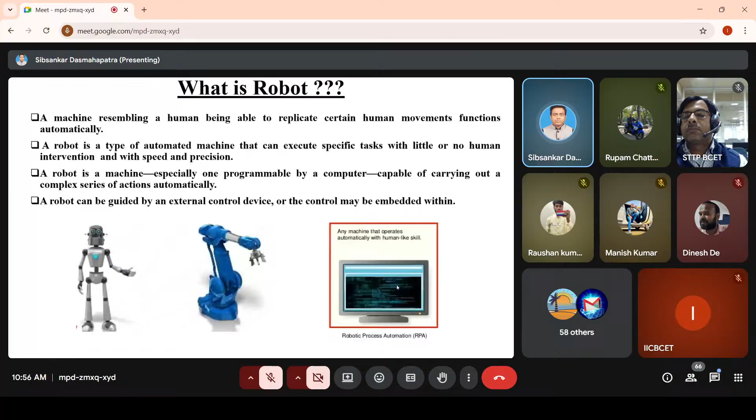So this is the main difference, this is the main definition of how you can distinguish the robot and the human beings. Try to understand that from this particular slide. Maybe there are a few sentences written, but this is the main difference between robot and human beings. Now comes the next slide, related to our STTP program.

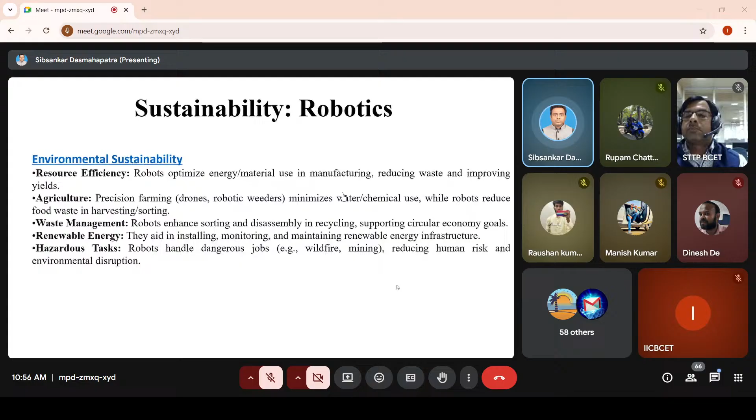What you have is sustainability. Sustainability means that development. Suppose you have to build an industry in an area, because you guys are coming from Durgapur. Durgapur is a very developed city, and the industries are there. Suppose another industry has to be developed in a place where some trees are there, so you have to cut the trees to build the industry. Now think about whether that development will be sustainable, yes or no.

One thing you have to think: I am developing the industry, that is fine, but at the same time you are decreasing the level of oxygen, because you are cutting some trees and some forest. So what you have to do is develop the industry, and parallelly cultivate some trees in another place, or maybe around your industry there should be some trees, so that the development will be sustainable.

This is one very simple example. Common people can understand how development can be sustainable, because we have to develop in a way that our future generation should not suffer. So this is sustainability.

Now comes the point of how sustainability is related to the robotics point of view, because my topic is robotics and your STTP is sustainability. So that should be related, that should be connected. How will it be related?

Now, from the environmental sustainability point of view, one point I can say is resource efficiency. What is resource efficiency? A robot can optimize the energy or material used in manufacturing. Now suppose a human being is employed in a manufacturing industry; he or she may not have enough idea how to optimize that material or energy. But a robot or manipulator which has been given some command on how much energy or material should be used for that manufacturing will be optimized.

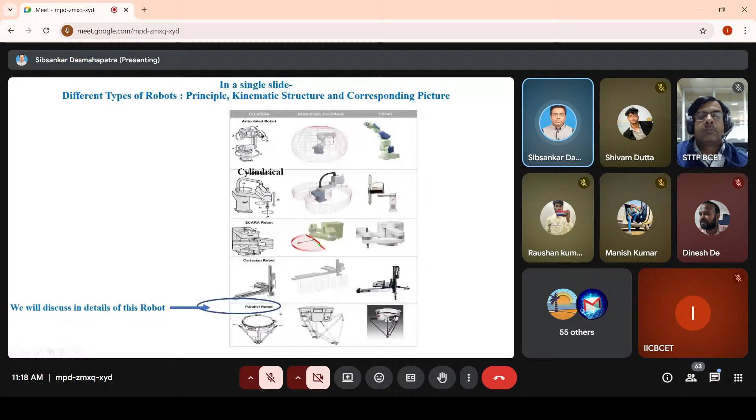Now comes to the different types we have already discussed in a single slide. I have given, in a single slide, some looks - this is the articulated, cylindrical, SCARA, Cartesian and parallel manipulator. Now comes to the parallel manipulator, which we will discuss here - how the modeling is done, how motion dynamics can be done, what is the kinematics, and their simulation work and experimental works done with some real-time experiments.

So theoretical discussion - what is a simulator? Now, which can simulate different types of simulators - that means, suppose a pilot has been given some training before going to real-time applications. He or she should be given some training - how it can be done. He or she has some idea before going to the real-time application, some idea related to a replica of that type of thing. He has some idea of how to operate the real-time application before going to that. What he or she will do with this particular replica - that is actually the simulator.

If I go to that slide, you have the idea of what a simulator basically is. This is the motion simulator - here the pilot will be placed, he or she will sit here, and below that platform the motions will be generated, and the pilot is sitting there. He or she has some idea of how to control in the real-time situation. So this is called basically a motion simulator.

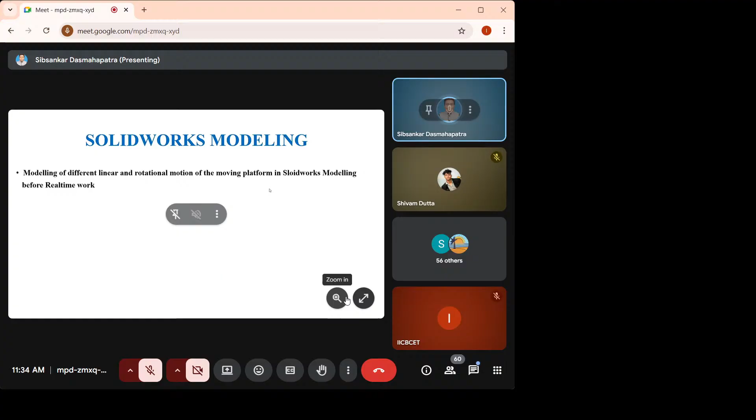So before going to fabrication, what is the fabrication term? Fabrication basically means going to the manufacturing part. So before that, you should have some modeling done in different software. We have done it in SolidWorks. SolidWorks modeling means you have to design exactly what you are planning, giving the bottom point, top point, actual dimensions, whatever you are planning, to that particular software.

If you go through that software you have some idea, or even if you don't, you can still do the work, because as a mechanical engineer, electrical engineer, or any branch, before going to real-time applications, you should go through SolidWorks modeling and simulation. Whether any error is coming, any fumbling is there, whether any correction is needed, you can do it in the simulation, where only time is spent but not too much money, because you are not going through manufacturing.

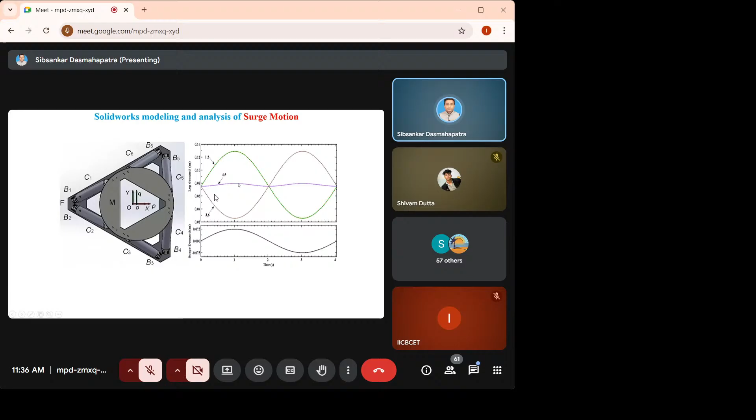So this is the SolidWorks modeling basically, where the three linear and rotational motions have been done. I am going through that slide now. This is the surge motion. In the slide, surge motion, if you follow actuators 1 and 2, that is the same extension motion. At the same time 3 and 6 are in retraction with the same magnitude but different phase, and 4, 5 show very small extension and retraction in case of surge motion.

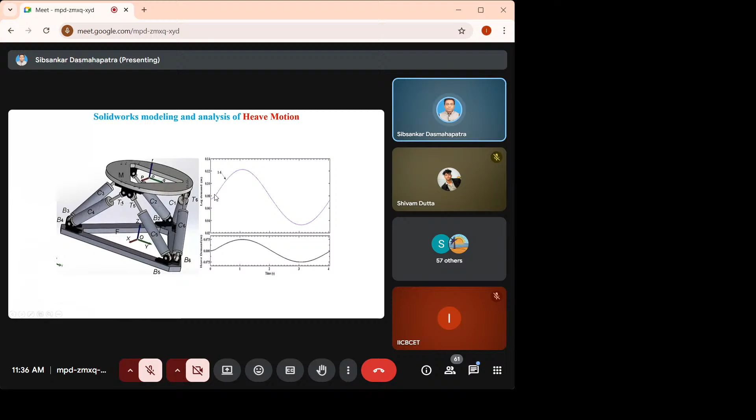Similarly, if you go through sway, 4 and 5 move in the opposite direction, 1 and 3 are coupled, 2 and 6 are coupled in the opposite directions. But in heave motion, all actuators move in the same motion, that means in the Z direction. So if you see 1 to 6, all the actuators have the same motion. Similarly, roll and pitch motions have been done in the SolidWorks modeling.

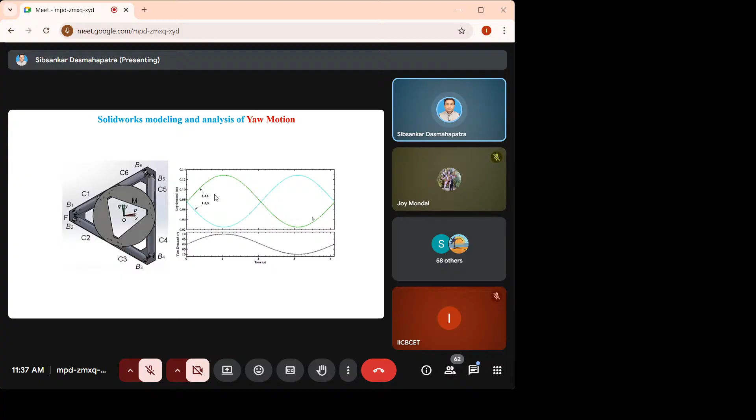Now we come to the mathematical part, the motion dynamic equation. This means how a particular piston and piston rod is moving inside the cylinder, which has to be done with mathematical dynamics modeling.

Why is it required? When you have to control each and every actuator individually, you should know the dynamics of that part. Just like a teacher going to class should know the characteristics of each student so they can control them. When I first joined a college, I had the problem of how to control the students. After a day, two days, ten days, a month, I learned how to control Mr. X, Mr. Y, Mr. Z, because all students have different characteristics, not a unique one. So similarly, you should have the dynamics equation.

This dynamic equation has been written, not going into the details, but this is how you have to design the dynamics modeling. Whatever you are designing, if there is dynamic motion, a dynamic mathematical equation should be designed.

Okay, then comes the kinematics. So what is dynamics and kinematics? This is related to our mechanical point of view. Other departmental faculties may have this idea too, but from first year or second year basic science, we have the idea of dynamics and kinematics. Dynamics is related to motions, where accelerations will be there. But kinematic analysis, in the particular 6 degree of freedom Stewart platform or serial manipulator, tells us the displacement of that particular piston.

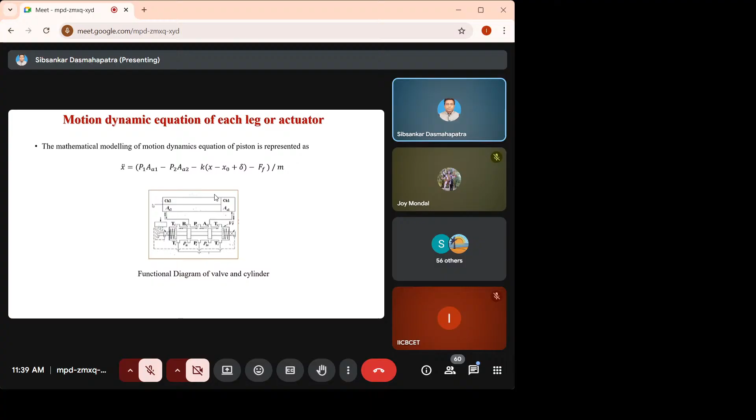Piston means the piston and piston rod. What is the particular displacement there? Once it will be in terms of force, then it will be dynamics, and when it will be only the displacement, it will be the kinematics.

So in the kinematics part for our parallel manipulator, there are two parts of kinematics: one is inverse kinematics, another the forward kinematics. What is inverse kinematics?

Suppose a third party gives the roll, surge, heave, whatever motions there are - he is giving a 15-degree roll, and I have to create it. The question is, to create that 15-degree roll or say 60 millimeter heave motion, how much displacement of each and every piston is required - that calculation should be done by the kinematics modeling, and that mathematics is called inverse kinematics. That should be clear.

What is the forward kinematics? Forward kinematics is just the opposite - meaning if you are giving the points of each and every piston motion, then you have to calculate the final motion of the moving platform. That mathematics is called the forward kinematics.

So these are the mathematical things required. The mathematical equations have been given - you can follow up. But I am giving the basic idea of what is inverse kinematics and what is forward kinematics.

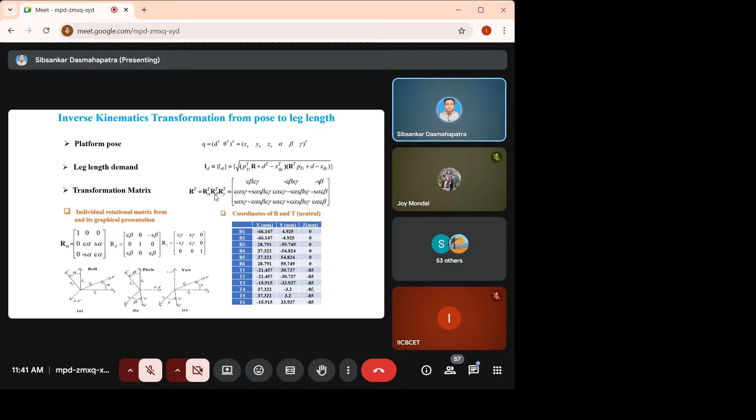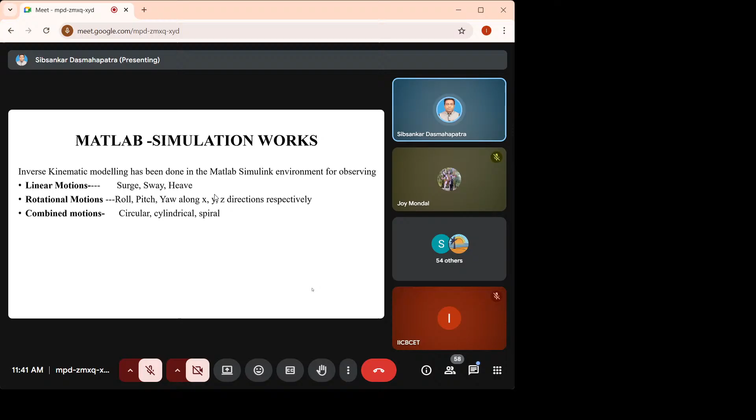Now comes the MATLAB simulation work. What we have done previously was SolidWorks modeling. Then, before going to the real-time work, you should have the MATLAB simulation to validate your SolidWorks modeling.

So in the MATLAB simulation also, surge, sway, heave and roll - each and everything has been done. It has been compared with the SolidWorks results, to check whether it is matching, yes or no, and how much percentage is matching. If it is not matching, you have to go back to the SolidWorks modeling or mathematical modeling to find where the errors are and rectify them.

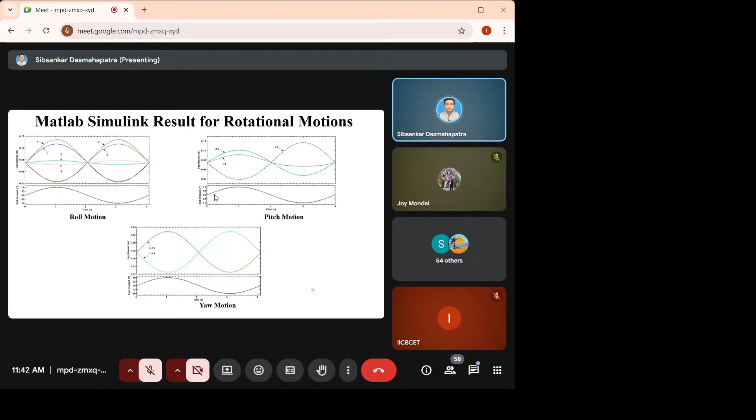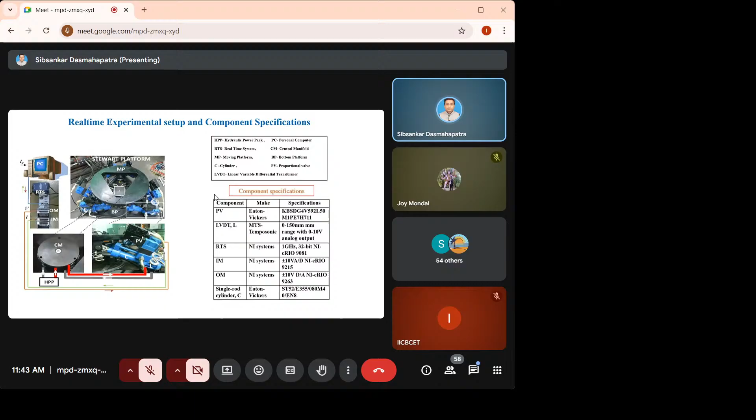This is the output module, this is the input module. The input module basically receives the feedback of each and every piston, how much it is moving. The output module basically gives the signal to the piston actuators in the proportional valve, how much motion should be done for each and every piston. So this is the total real-time experimental setup with the hydraulic actuator.

This is the controller design. What I have told you is the requirement of dynamic modeling or designing some controller. Controller means something which will control your required motion. Suppose you are giving say a 15-degree roll, it will be calculated by inverse kinematics modeling how much the required position of each and every piston should be - that is called LD.

Now you are sensing with the LVDT - LVDT means linear variable differential transformer. So with that you are measuring the actual motion of each and every piston and comparing whether it is close to your desired motion. If there is some error, you should rectify it.

So how can you rectify it? That question can be solved by the controller. Controller basically - just like in your college there is an exam controller - the exam controller's activity is to control the exam process very smoothly without hampering normal activity, without any failure of registration of students, or without any error in uploading numbers of students. This is the purpose of the controller basically. In our real-time experiment also, that controller's activity is to rectify that error.

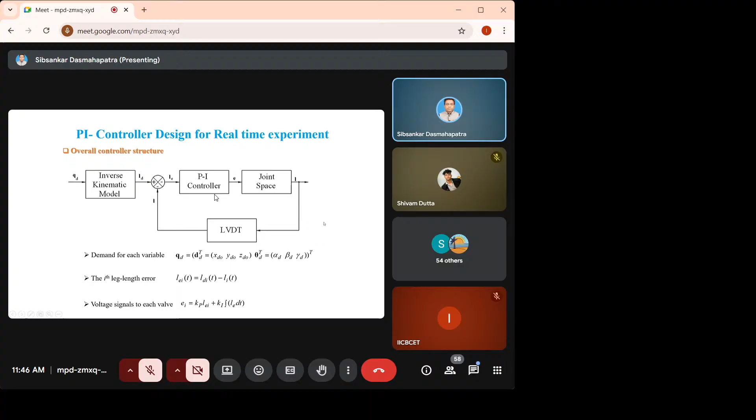That controller will produce the required command signal that will go to the proportional valve, and that will control whether positive voltage, negative voltage, or any type of command will go to the proportional valve in our figure. Again, it will come to the LVDT, and that process will be in a loop basically. So this is the PI controller design part.

Then there is the real-time experimental work with some single actuator and 6 actuators, with a few videos there. I'll show you after completing this part because it will take some time, so I'm not disturbing here.

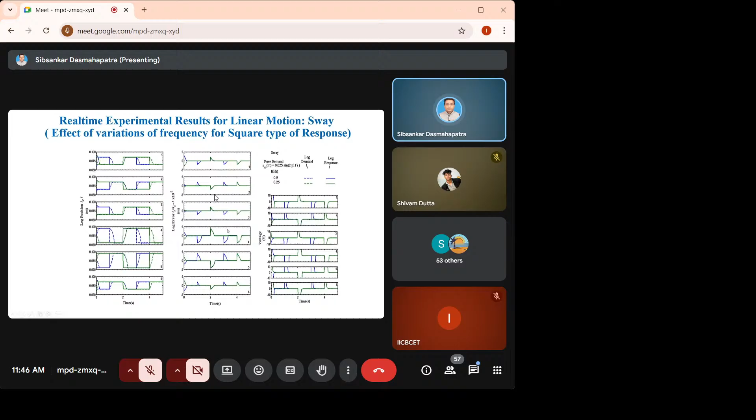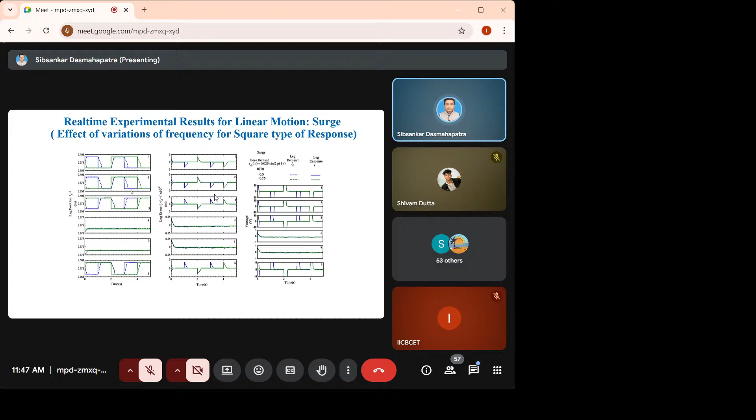Now let's come to some few experimental results. This is for the surge motion, few experimental works have come, and this is the sway. This is the heave motion. In heave motion, all 6 actuators are in the same motion, but in case of surge or sway, there are some coupling motions of different actuators.

Similarly roll, pitch, yaw, these are the experimental works. I'm not going through them in detail, because if you students go to any research work in future, you will have to go through that part yourself.

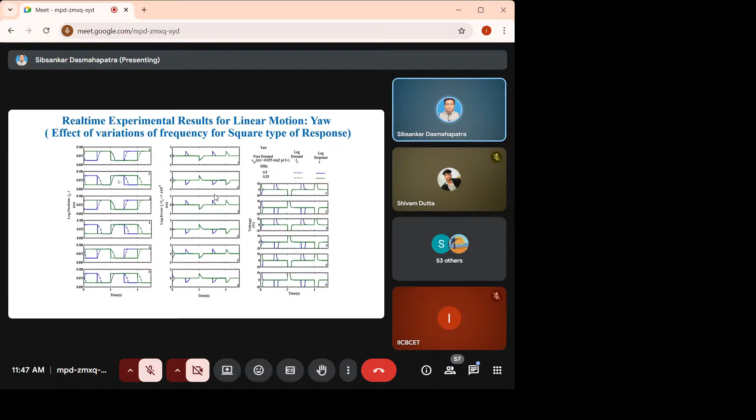Now let's come to the real-time motion of the electric Stewart platform. That work has been done by Mr. Mintu Ghosh, who is the assistant professor in our college. He has developed that part and is doing his research work as a PhD under my supervision in my college. That establishment has been done.

These actuators are electric actuators that have replaced the hydraulic actuators initially used. Why? Because cost is less - when you purchase a hydraulic actuator, the cost is very high, but load negotiation is high in that case. Here the load negotiation is less, most probably 200 Newtons per actuator. So if the moving platform has 1000 or 1200 Newton load, it can negotiate that near about.

The host PC controls what I told initially. Here an Arduino Mega board has been used, and for each and every piston that has to be controlled, we use the motor driver L298N, and another component is the voltage supply. That means 23 voltage supply has to be given to each actuator, and 5 voltage will be required for the Arduino Mega board, and the motor control card also requires it. So that's why one power supply has been used for everything.

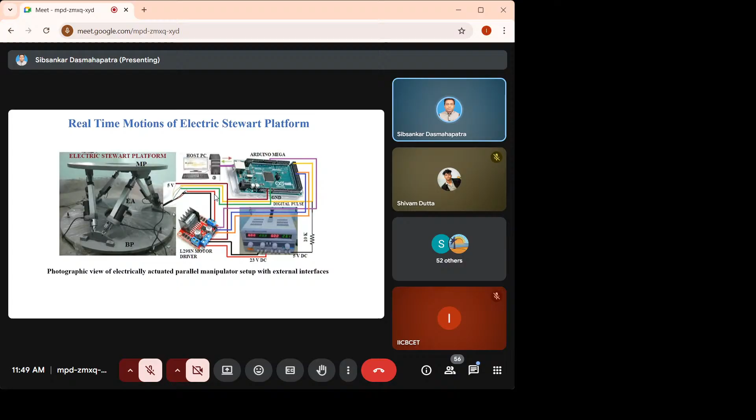Our main challenge was to get the feedback, because the feedback mechanism was by a Hall effect sensor which gives 0 or 1. From that 0-1 pulse counting, we had to determine how many millimeters of displacement of the pistons there were. That was very challenging work, taking most probably 6 months to 1 year. Mintu did that research on how to get that value, because there was no previous idea to go by - we had to do trial and error, and finally find out the result: within this much pulse counting, that much millimeter movement of the pistons occurs.

Now let's come to a few real-time applications he has developed. I have taken these figures from him. Thanks to Mr. Mintu Ghosh for developing these things and doing this work.

Suppose you have to design a slot like this, a 40-degree angle with radius 0.08 meter. If you do the yaw motion from minus 20 degrees to plus 20 degrees with amplitude 0.08 meter, the wax container is fixed and the moving platform moves. By that motion, you can make that type of slot. What is the advantage? When you make that type of slot manually, there will be some problems.

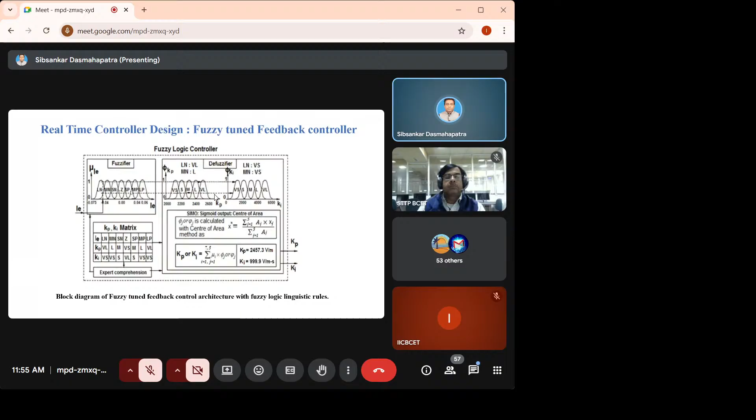So, what results has he already gotten? I have given here a few results with PI and fuzzy PI. If you compare PI and fuzzy tuned PI controllers on control parameters like integral absolute error, control effort, variance, standard deviation of error, and other parameters—I hope he has given IAE here. There are other control parameters too that he has results for, but they're not shown here, because you have to choose which controller is suitable for a particular operation, and then do the operation accordingly. So this is how you have to choose the controller.

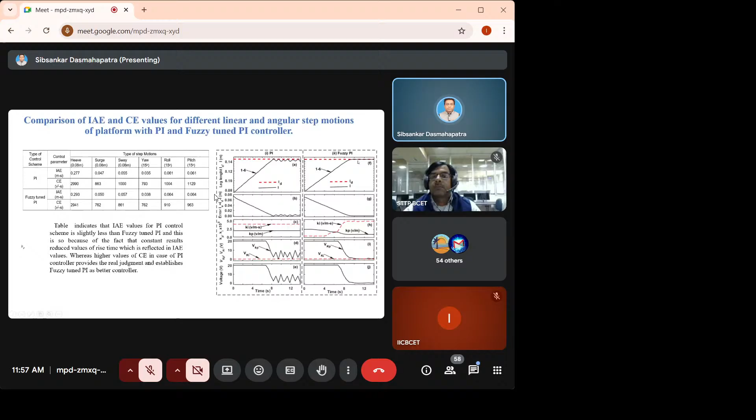If you see the figure comparing PI and fuzzy PI, in case of PI there is a noticeable chattering, meaning up and down vibration of the moving platform. In case of fuzzy PI, there is no chattering, because the error is less. In case of PI, nobody decides the value of KP and KI depending on the error, but in fuzzy PI, fuzzy logic does that—when the error is less, the value of P and I will be less. That's why there is no chattering, and the operation is very smooth. This is the noticeable figure I wanted to mention here.

Now let's come to some videos with the electric Stewart platform. Just check if the video is visible, Mintu?

Yes sir, it is visible. So this is the electric neutral to 80 millimeter. It is written neutral means total motion of the electric actuator, what we have taken, that is 0 to 150 millimeter. So neutral position is mid-span of each and every piston, that means 75 millimeter motion. This is called the neutral position in our case. So neutral to 80 millimeter means not the electric pistons, but 80 millimeter of your moving platform motion. So for the 80 millimeter motion, how much motion of each and every piston, that will be calculated by inverse kinematics. So that is the requirement of inverse kinematics. This is basically the heave motion what I have shown here, neutral to 80 millimeter.

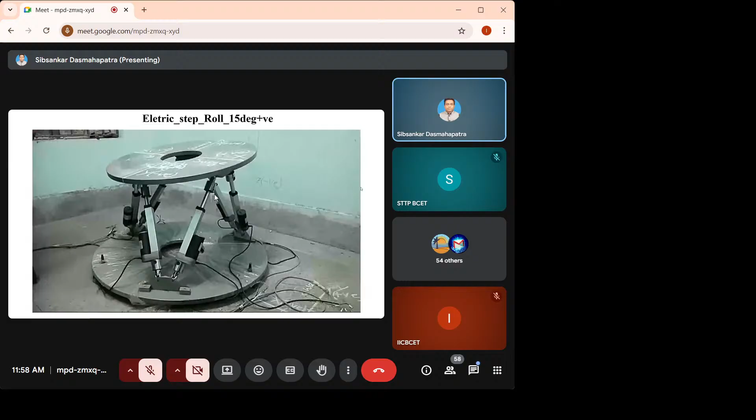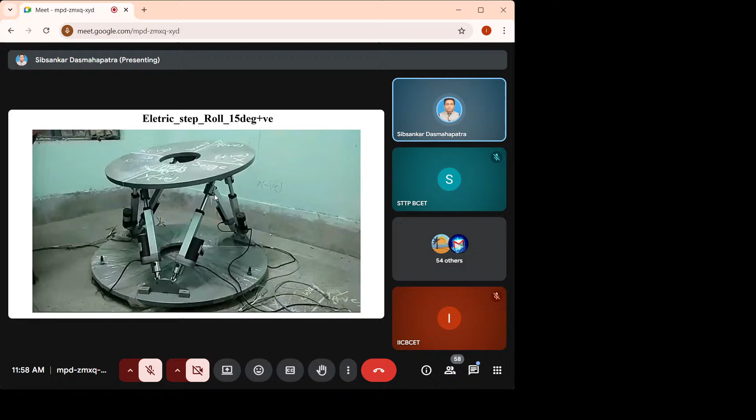And this is the surge motion. If you see, along the x-axis, that motion is done. This is the surge motion, 80mm surge motion. Yes.

And this is the yaw motion. Yaw motion means along the z-axis, the rotational motion is there. Yeah, this is a very typical type of motion.

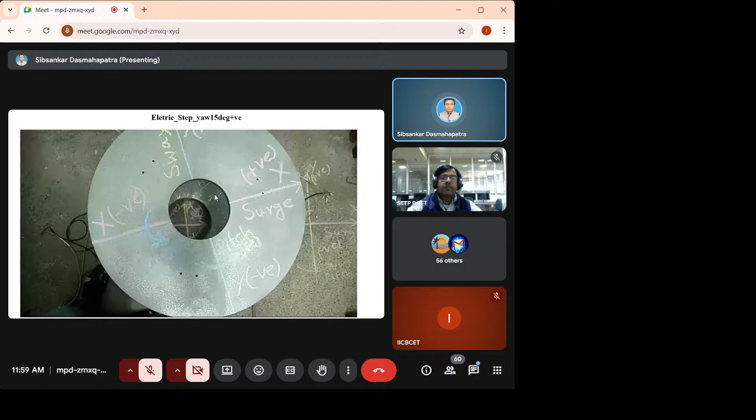Really, I'll share my feelings before going to that type of motion. I was confused also - if that yaw motion will be there, is there any breakage to the different joints? I have done simulation works in SolidWorks and MATLAB, but when it was done initially with the hydraulic actuator, I was confused. But as that design was very fine, there is no breakage, because it is just like a twisting type of motion. That is the yaw motion it has done.

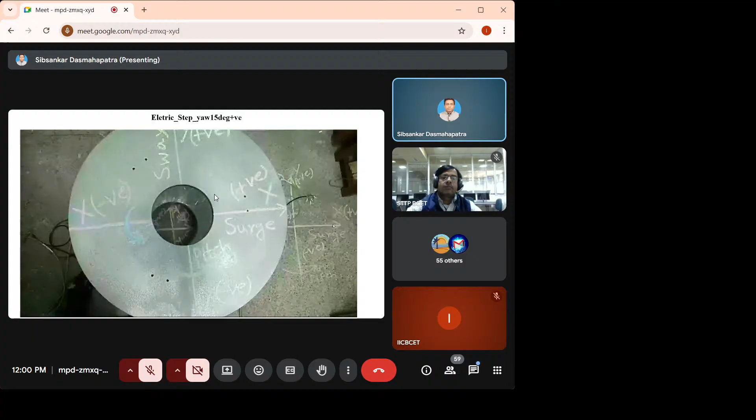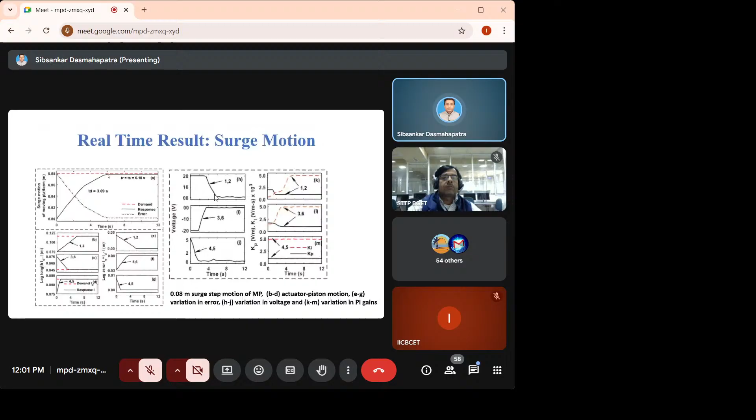And this is the yaw motion results. These are the publications. Before going to the publication, what I told you is that I'll show the figure with some hydraulic motion. Just trying to see whether it will be working, yes or no, because most probably it will be working. Just wait, it will take a few minutes. Just wait.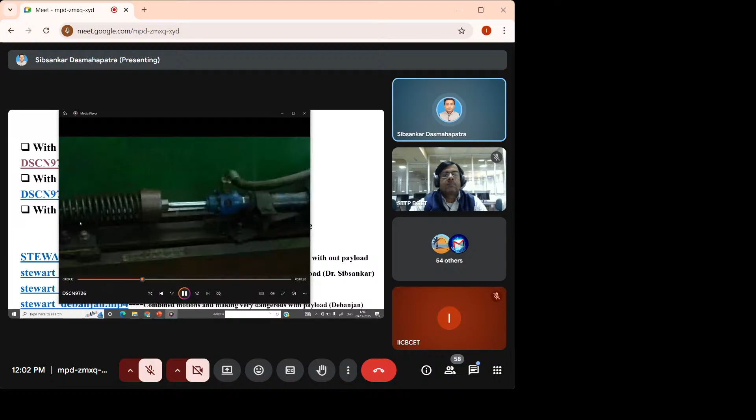Yeah, if you see, this is the hydraulic single actuator. Then the loads are springs, high compressive loads are there, and it is moving with sinusoidal motion. This is the hydraulic actuator basically. There is one port coming from the pump, this is going to the tank port, this is the load given, and this part is the LVDT basically. LVDT measures the actual displacement of the piston, and this is the PC where it takes the actual position to the input module, output module, and these are the results. If you see, the white color is the demand and red color is the actual position. Maybe there is some noise, so there are some peaks and dips in motion - you can see that in the real-time results. So this is why I am showing here - this is the real-time experimental point of view.

This is done with LabVIEW basically. With the LabVIEW software, we are taking each and every movement - what is the actual position. This sinusoidal motion has been done.

Okay, another video is also there, but one important figure I am going to show you. With that Stewart platform, or 6 degree of motion, my supervisor was there - two supervisors were there basically, Professor Dipankar Sanyal and Professor Rana Saha. Professor Rana Saha is sitting on that Stewart platform. I requested, sir, please sit on the Stewart platform. I designed one chair, and the chair was placed on that platform, and Professor Rana Saha was sitting there, and I gave all the demands simultaneously - that means heave, surge, sway, and roll, pitch, all the motions have been given, and he had that feeling.